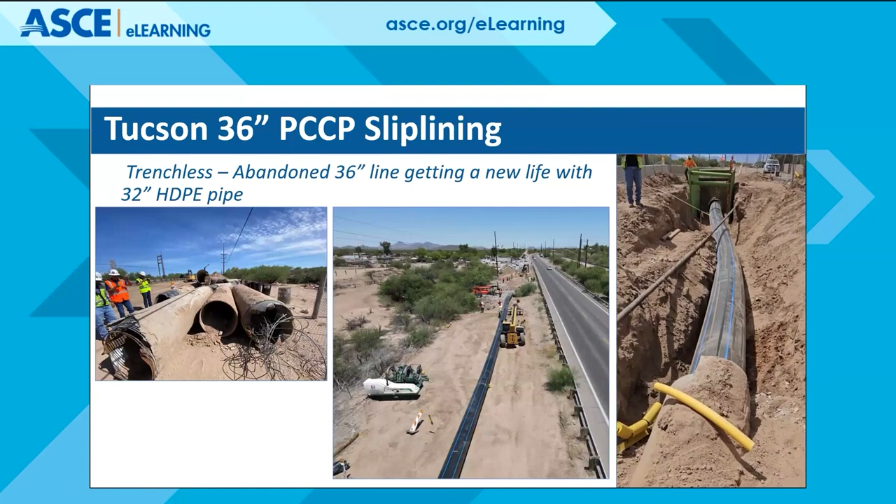So we've got some information for you here. This video is showing us the extent to which we are using that natural property of high-density polyethylene and that allowable bending radius to come right through, avoiding bends, to be able to pull that into place. Pretty impressive what we're doing out there in the rehab space and also new installation space.

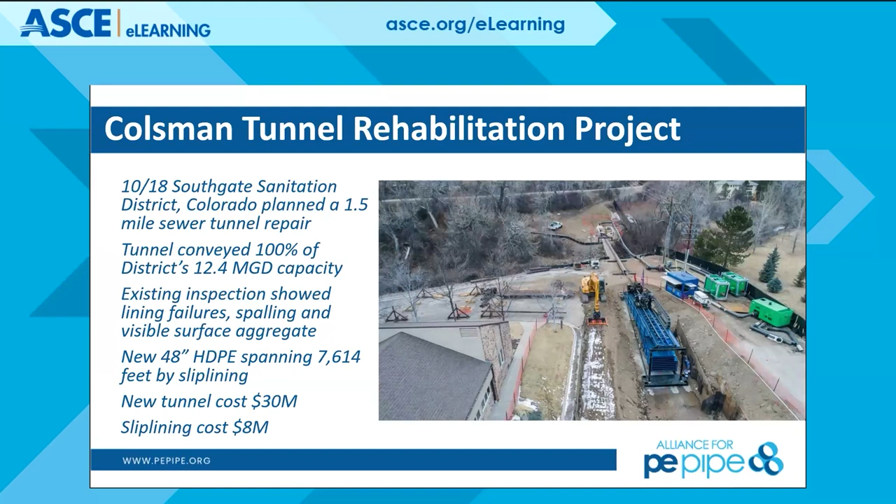So here's a Colsman Tunnel Rehabilitation Project. This is another slip lining application used for a tunnel. A new tunnel through this location was looking at 30 million, but that slip lining is only 8 million, so we saved a fairly significant amount of money for this agency by repurposing this tunnel that had failed in that scenario.

As that pipe gets bigger, so do the logistics of handling that pipe as we come through it. You'll see all of the equipment now starting to scale up and get larger as we're dealing with the appropriate butt fusion equipment to make sure that joint we're fusing together is as strong, if not stronger, than the pipe itself. Now we're fusing a pull head on this to facilitate slip lining through this tunnel. There's quite a bit of pipe length, and definitely some logistics in being able to fuse all that pipe run up in advance.

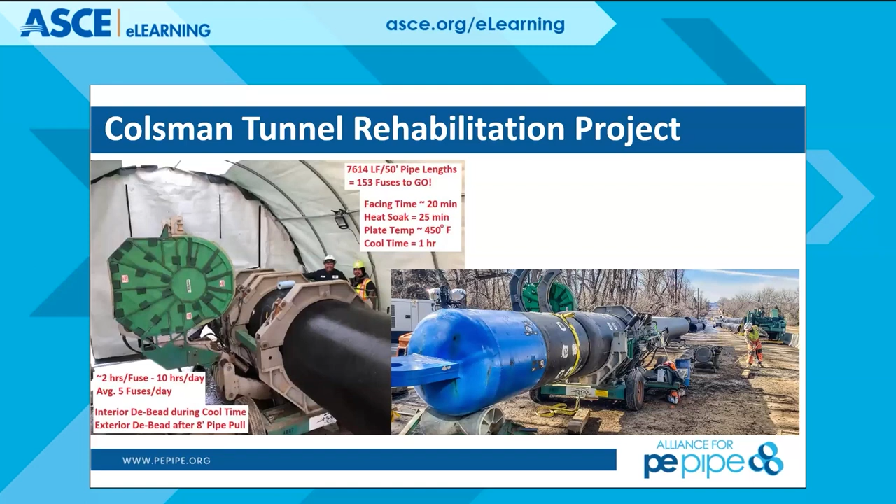One of the key things that experienced installation contractors for high density polyethylene recognize is: the longer that run we can fuse up in advance, the more we'll take advantage of the fast installation methods of a trenchless technology project, to be able to maximize that productivity.

So here we're looking, getting some of the details into putting it into the East Portal Tunnel as we're seeing here.

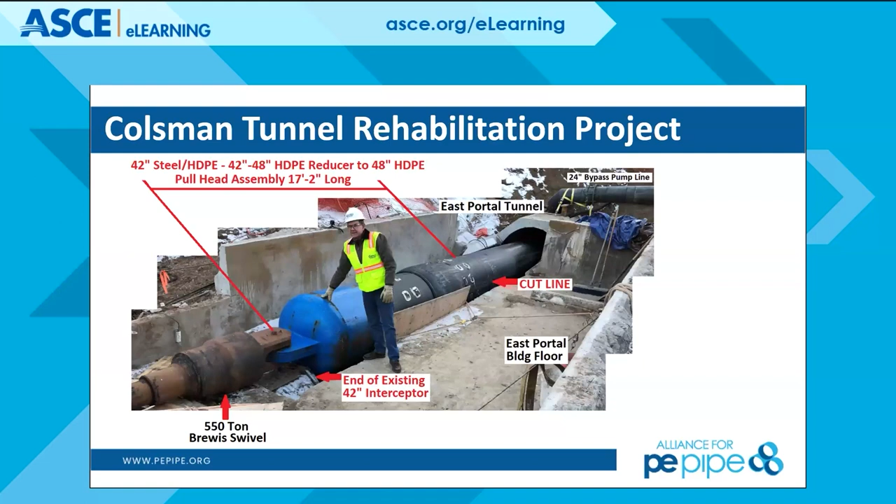So here we are. After the pull is done through this tunnel, we've got a swivel and multiple different pull heads to be able to diffuse that pull force as we go through. And we are repurposing this as well.

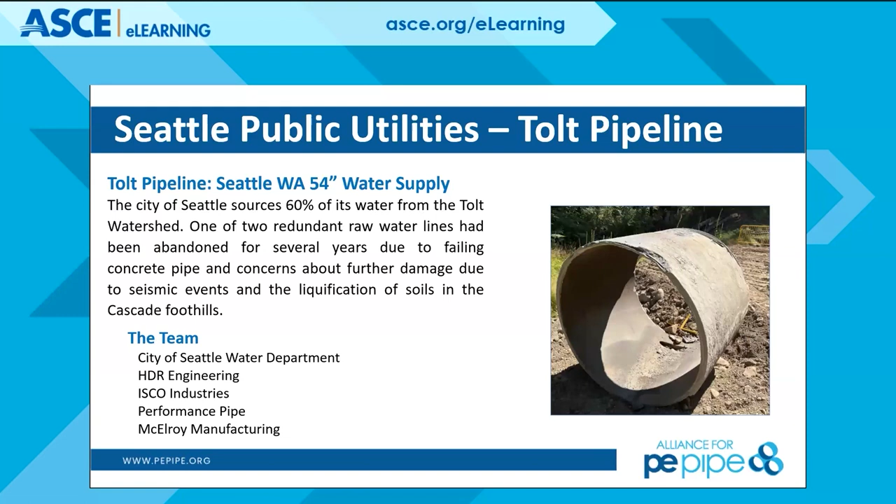So here's Seattle Public Utilities and the Tolt pipeline. This one originally was installed open cut, and now we're installing this via slip lining into an existing pipeline itself. Raw water lines had been abandoned for several years, failing concrete pipe, and then also some seismic events that shifted the soils around the existing pipeline as we pulled that through.

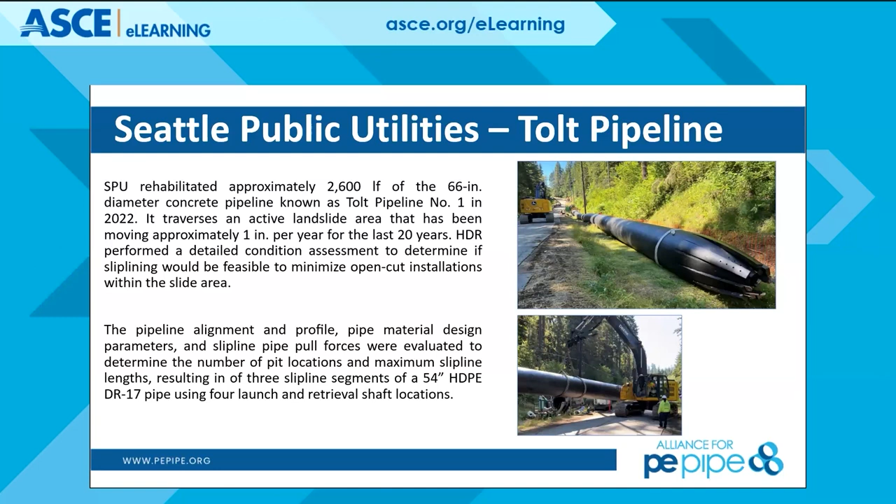So you'll see some of the contractors here had fashioned, field fabricated the pull head to start to slip line that process through it. This really proves the ruggedness and durability of high density polyethylene and the sheer things that you can do to polyethylene in the field, and it still is a very good product as we go through. Obviously this pull head would be cut out and terminal final connections would be made on the clean high density polyethylene through that, but these really are just illustrations of what we can expect to work with for high density polyethylene. Brian, you want to come on and talk to us some about this large project?

We spoke before. I believe you worked on the south end of it. This was quite a large project in Fort Lauderdale. That was an emergency project as a force main was leaking water into the Intracoastal, if I remember correctly.

Yes, sir, it was. It was a series of fairly new pipes that were put in that corroded. And once it corroded within about 5-6 years, obviously the main line there was out of business. So the idea, because it was an emergency action, they split it into 2 contracts. Both contractors had to put in 54-inch diameter HDPE pipes, pretty much parallel, and then tied into the existing valve system and the existing sewer system, all in downtown Fort Lauderdale, while still keeping the streets active.

It's quite an event. It came in pretty much on schedule and on or slightly under budget. Commend to people like Murphy's Brothers and Dave Mancini and Sons, the 2 contractors that had to work out the logistics under very difficult conditions to make this happen.

If I remember correctly, they had vac trucks going 24 hours a day. So just that bypass alone must have been a pretty large expense through this whole process as well. Yes, sir, the bypass can almost double the cost of a project. So certainly consider it whenever you're doing a project. I always ask, one of the first questions I always ask, is whether or not that line is redundant for us. So that's definitely a big one here.

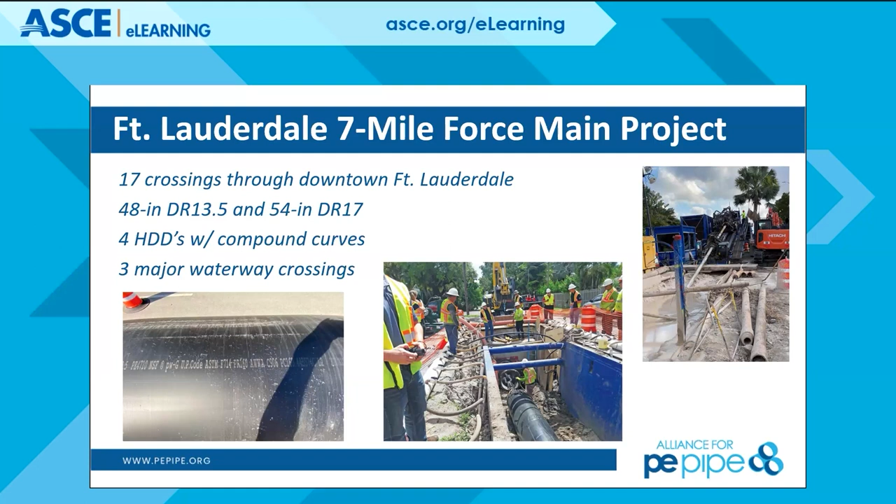Oh, great. Well, that's certainly better than most of them being a pain in the butt. So sometimes we get those too, right, Brian?

That's a common theme with these past two projects there, Brian. That's very good to hear. We had a couple of questions already, and I love to see them coming in. So, terminal connections - after we pull this trenchless into place, what are we looking at?

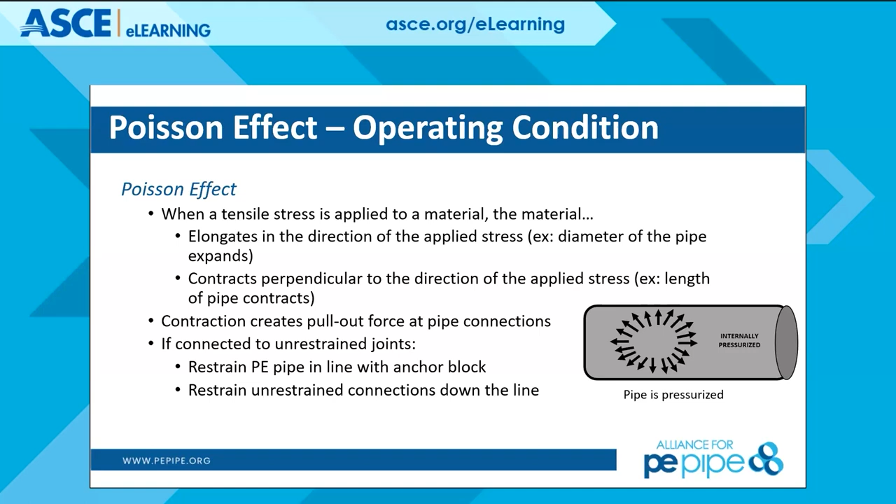And then we look at thermal effects in a lot of installed pipelines. If we're conveying a fluid that doesn't change in temperature, the installed thermal effect really is a temporary condition. So that pipe is sitting above ground, warming up with the sun until we're ready to pull it into place, and then after we pull it into place, that pipe will relax prior to making those final connections.

So one of the unique things about high density polyethylene is this modulus of elasticity and how different it is from carbon steel.

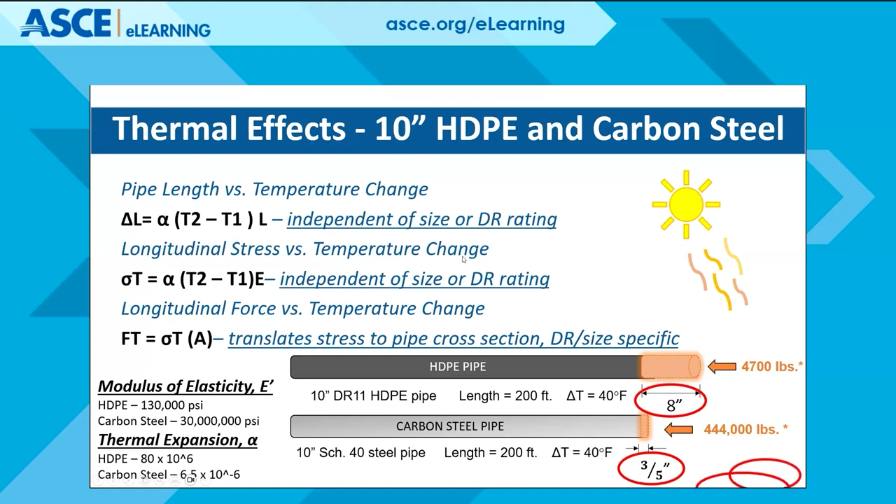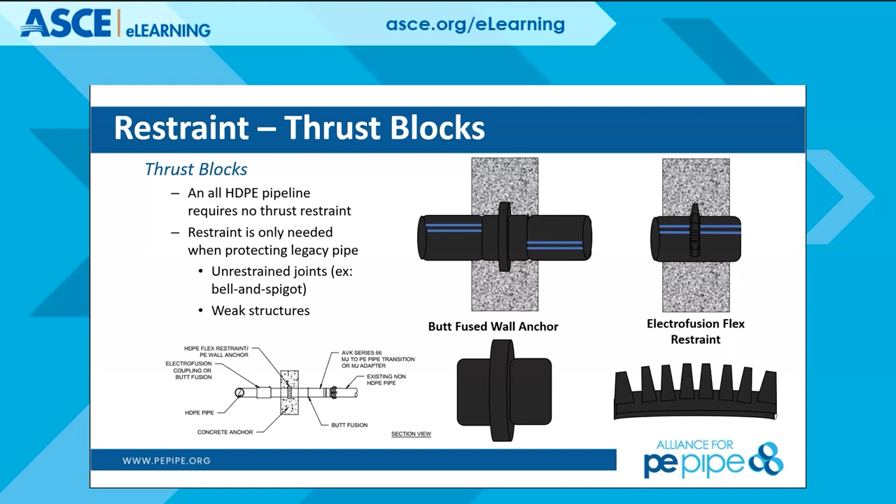Thrust restraint in the polyethylene world: every fused joint is considered a restrained joint. So when we look at thrust restraint, we want to make sure that when we're connecting to alternate pipe materials, we're not going to pull that bell and spigot pipe out of its bell and spigot, since there's no restraint force around it. We're not detrimenting the polyethylene. If you ran polyethylene from point A to point B, you'd have a fully self-restrained monolithic system. It's when we connect to other material types that we want to make sure we're using a restrained joint and not pulling that other pipe out of its bell and spigot.

So what does this look like? Go ahead, talk to us, Pete. You're on mute—sorry about that.

I've got a great question, Alan, I'd like to share with everybody: what is the proper procedure for testing a pipe string before you pull it into the ground? Is it 1.5 times working pressure for 10 hours, or what are the rules?

That's a great question. There's a difference between the operating pressure of the system and the design pressure of the pipe. As engineers, we're fairly conservative folks. Potable water systems have adopted DR11 primarily for their pipes, which happens to be a 200 PSI working pressure system. You could charge that to 1.5 times the design pressure, but that's quite a bit of pressure to achieve in the field. What's typically used is the operating pressure of the system being installed, amplified 1.5 times for a duration to overcharge the pipe, as Brian mentioned, and then we lower that pressure to continue observing the test to make sure we're not losing any water. Any added water to a non-leaking HDPE pipe could be due to that thermal effect and the Poisson's effect we talked about.

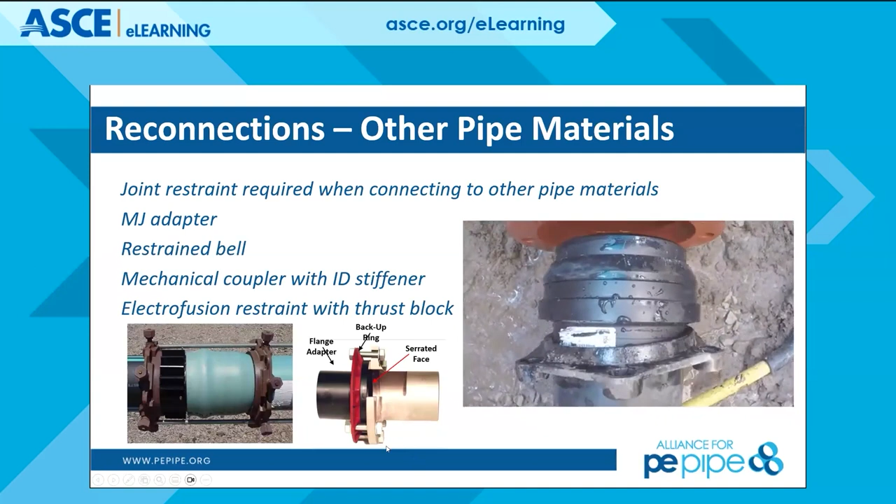Absolutely, great comment there, Brian. I really appreciate that—the last time I did pressure tests in this manner, I had the same nerves about that end cap coming off. But once we restrain it properly to the HDPE pipe using these restraints, this MJ adapter is belts and suspenders, very heavy duty, lots of good material within this adapter. It can also be done in wet conditions, unlike fusion. So if you've got a leaky valve that simply won't seat and you have some water in a potable water system as we're connecting, you'd fuse this MJ adapter on in advance and then pull it right there.

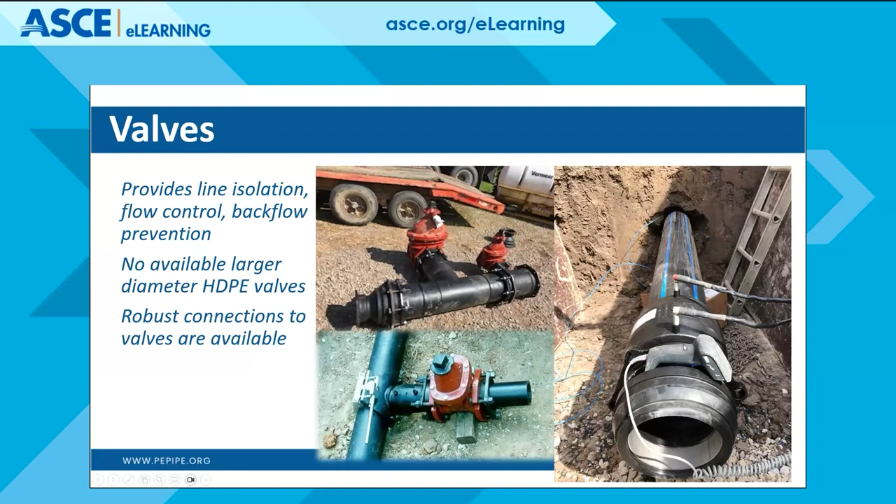Same connection to valves: the industry itself does not have HDPE gate valves. Now HDPE ball valves have started to be used in larger dimensions and larger sizes in irrigation, but they just haven't quite made their way to the municipal water and wastewater market. So we do have to have the MJ adapter or another type of fitting to attach to these valves to be able to control flow as we go through.

And for terminal connections, there are lots of agencies out there, such as Core and Main, that can come on. Rusty, if you wanted to, talk to us some about the fittings that you're going through in these manners.

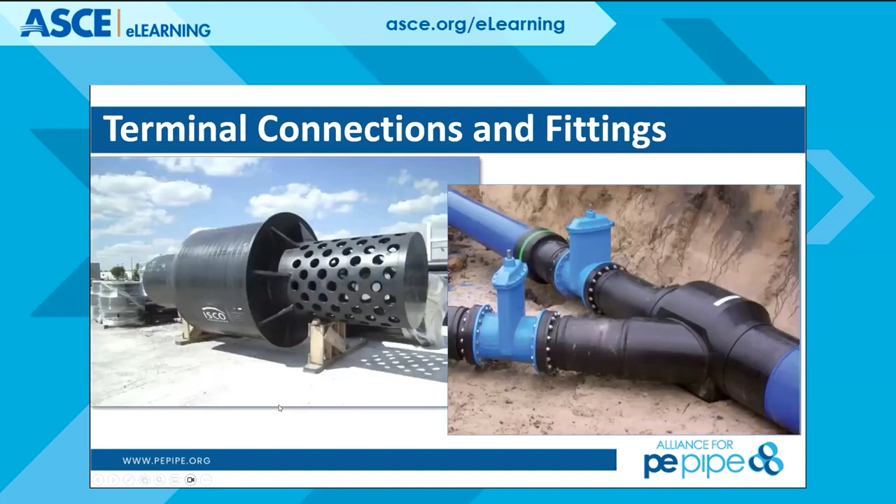There's a lot of different things you can put together and fabricate for somebody to make those terminal connections. That's one of the great things about the increased use of polyethylene in waterworks systems. It's very established, been around since the 50s and 60s, and started on the industrial side.

With the proliferation of no-dig applications, we have a lot more fittings involved. Any type of connection you want to do with polyethylene, if you can fuse it, that's the best way. You're not adding a third or second material, no gasket, no metallic component. If you can keep it polyethylene, which you do with electrofusion or butt fusion, that's what you want to do.

We have in-ditch butt fusion equipment that can go up through 63-inch to do tie-ins. We've done over 500 fusions with this equipment, and it's great for getting into those small places you need to. Of course, sometimes you can't do that, so electrofusion comes out as a backup, your second option. From there you go into mechanical types, either flange by flange, MJs like shown before, and all types of saddles that are also available.

Ideally you do want that fusion if you can. Even flange by flange is really good because the best gasket material you can use is a Teflon material, and that Teflon has the same durometer as HDPE. So if you're going new to new on flanges, you don't even need a gasket in there. You bolt that together and it gives you a zero leak rate system, which is probably one of the biggest positives of using HDPE piping systems.

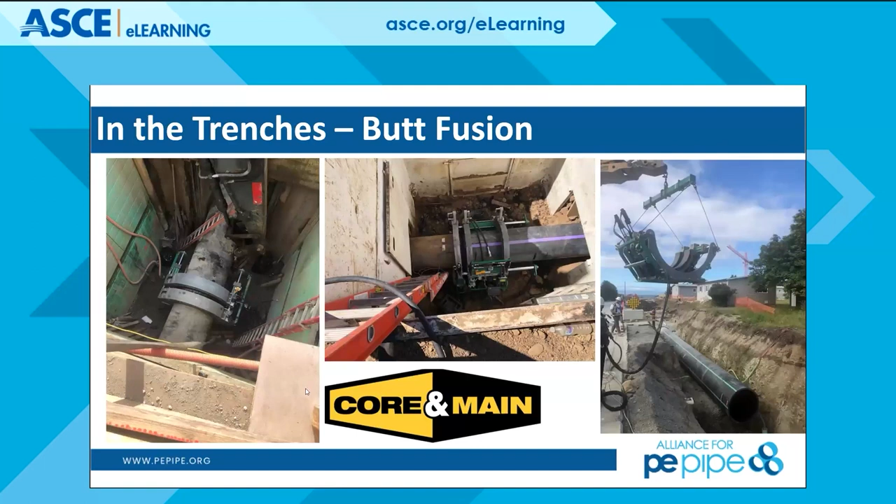Thank you, and Mary, thank you so much for that follow-up. So here we'll roll right into HDD. Brian, come back on and take her away, bud. Sounds good, I appreciate that. I'm going to talk a little bit about...

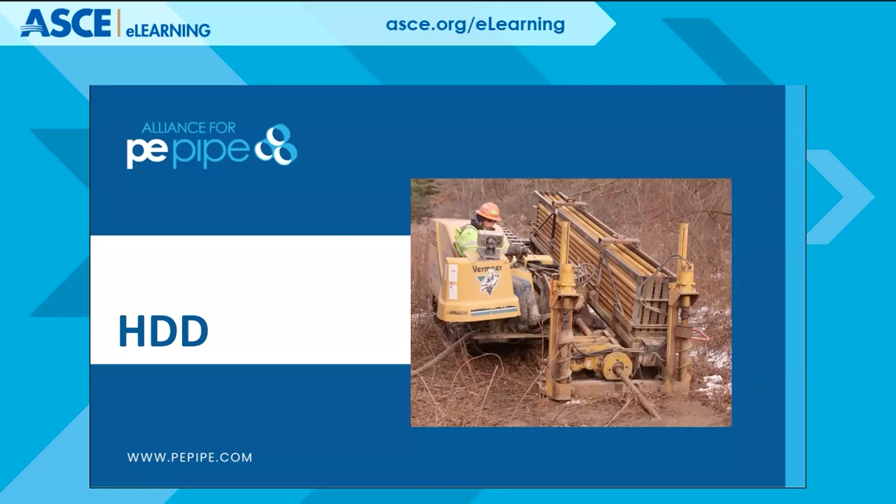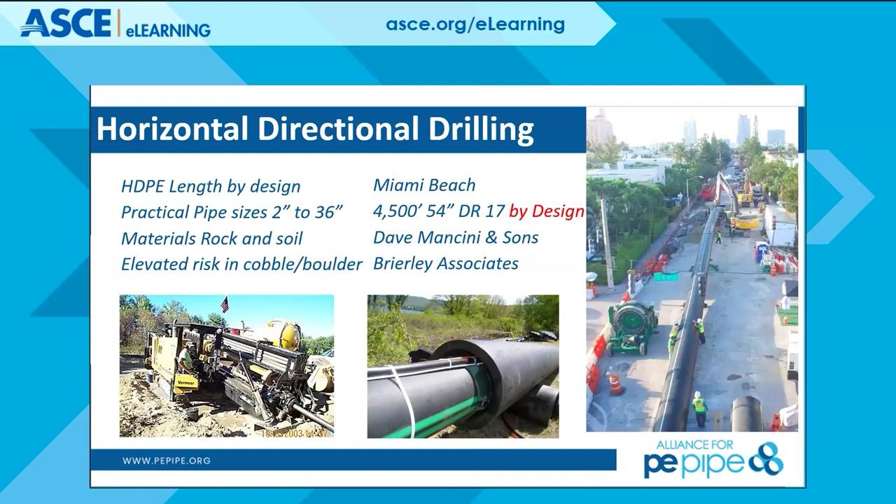HDD, horizontal directional drilling, and the use of polyethylene pipe. I'll be pretty much focused on that. With this type of pipe and this type of engineering, you'll find it different from other types of pipe. You need to be both a pipeline engineer and a pipe engineer. There's a distinctive difference, and I'll go through that in the discussion, irrespective of whether you're talking small, large, or double stacked like the force main in the middle there, or the real long one, which is South Beach, Miami, trying to handle the pipe into the ground.

You need to be careful about actually designing the pipe. There's a pipeline engineer, which designs the geometry of the bore, and there's a pipe engineer. You have to look at your materials, understand what you're working with to make sure that what you're designing will work under your situation. More failures out there occur because of lack of proper consideration for the materials you're working with. Nothing wrong with the materials, but be conscious.

And they're very well published materials. So between that, the only other quick comment at the beginning here is production rate. It controls your pricing on any project. So if you have rock, it's going to go slower, it's going to cost you more. If you're in soil, you can get less cost. It's not the contractor changing and playing games with you. It's what the ground will let you do.

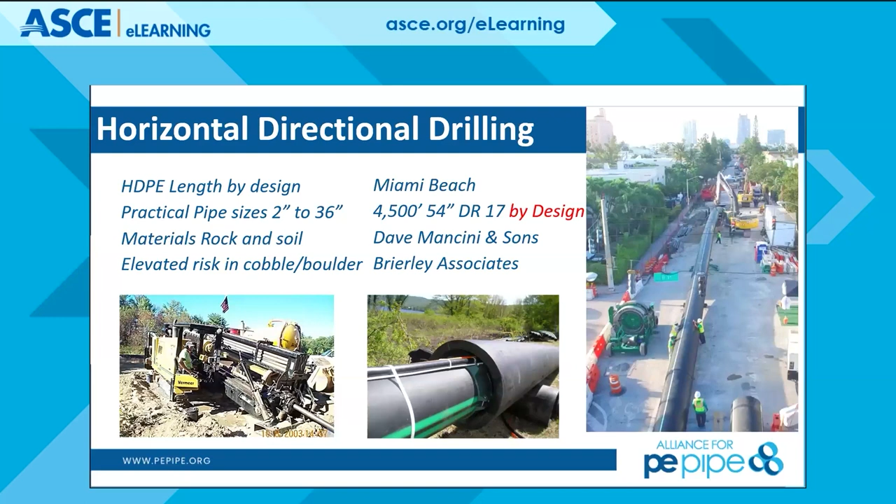So with that, just a basic of what horizontal directional drilling is. It starts out with a pilot hole, which you have to steer through the ground. A whole bunch of different steering techniques out there. You can either use a wire line, a walkover. It's very dependent on the type of conditions you have. This is the type of thing that once you have a project lined out, discuss this with steering experts. Find out what's going to work best for your system to be able to steer it from one side to the other. Next slide, please.

The next step is you got to make the hole bigger, unless you're just doing what's called a drill and pull, where you drill the pilot through, grab your product pipe and pull it back. But a lot of times on the bigger pipes, you got to make the hole large enough to pull your product pipe through. That's what the pre-reaming is for. Usually you bring your pipe up, the rule of thumb is 1.5 times bigger than your pipe OD. That can be changed around with some techniques, and people have gone as tight as no difference.

So this is a general discussion of how HDDs are done, not the only way they can be done. So be aware there are other ways that things can be done.

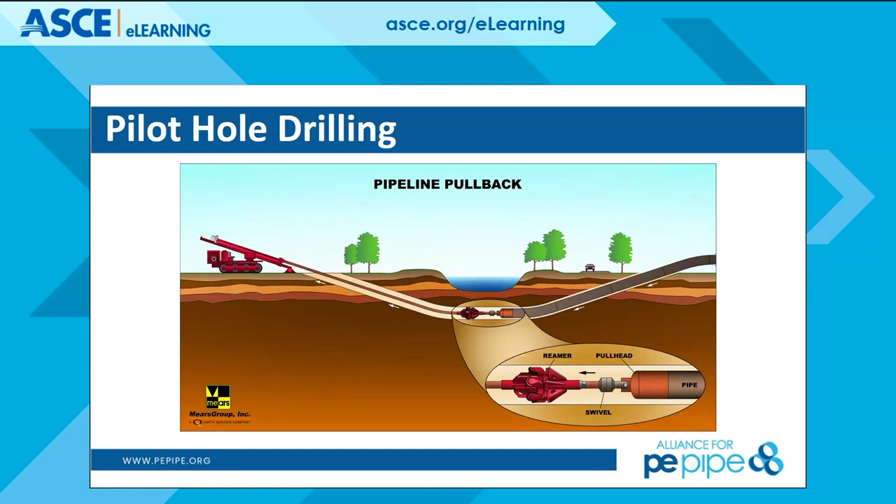Once you have the hole prepared, you clean it up by pulling a swab through the hole. Make sure you've mechanically removed your cuttings and whatever's left over in the hole. Grab onto your pipe and pull it through. This is where you need to pay attention to your pipe materials. I don't care what kind of pull you have. If you have a good hole, you can calculate fairly reasonably your pull, and that'll tell you how far you can go. That's part of the planning process.

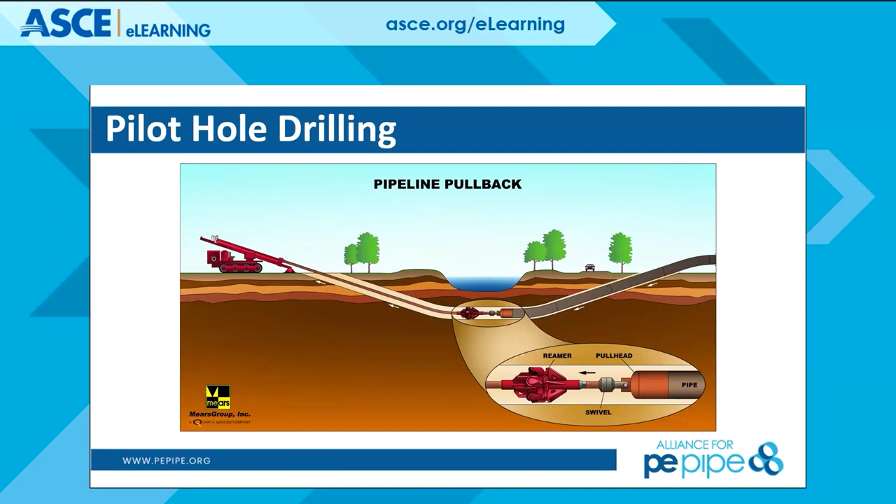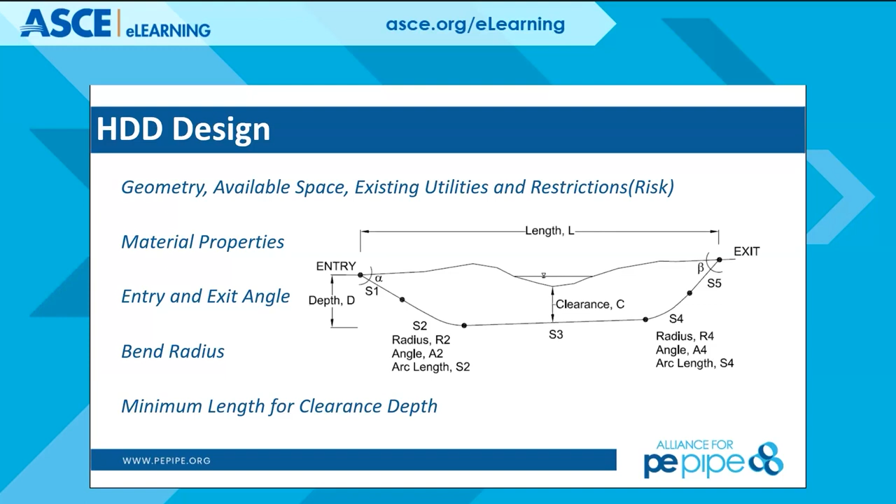With regard to design, design is basically planning your job, trying to anticipate issues that may occur and fix them. Part of that is selecting your materials, your material geometries, your material cross-section areas, properties, etc. Remembering that design, just like they say in the Army, your plans, your design, they're only as good as the first shot in the ground. Be flexible, work with it. It's a planning tool. If you try to use it as 'the contractor will do this no matter what,' you're probably going to be disappointed.

Next slide, please. As I mentioned earlier, these are the different types of steering. They require different work areas and different accesses to the site. One of the main things is, it sounds like trenchless - well, you only need to have one access point at one end and a receiving point at the other end, but somehow you've got to steer things. When you talk about things like a walkover, all you've got to do is be able to walk across your site. Well, if you're doing that on a 4-lane highway, there are techniques available to assist you with that, even with a walkover.

Or you may have to go with a wire line, which is a little bit more precise with depth, or you might have to go with a gyro. Each one of these has pros and cons. This is why once you come up with a project, it's really beneficial to talk to an expert in steering to get the type of steering you need to accomplish what you're trying to do. If you want to have a pipe within 1 foot of a particular location in the ground somewhere, you're going to be adding a lot of cost.

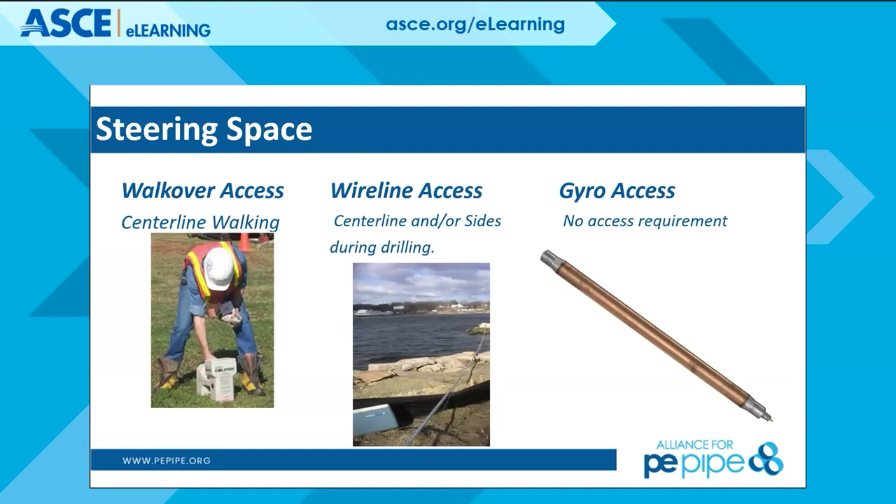Not that it can't be done, but that's up to your steering people. Find out what it's going to cost and what you need. The other one is know where your utilities are.

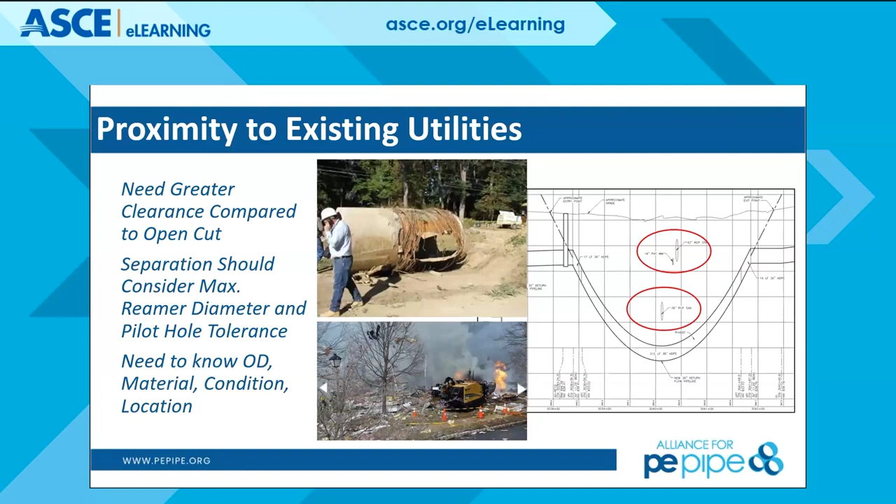So pay attention to what you're doing, pay attention to where the utilities are. And basically, rule of thumb, give yourself as much clearance as you can get. It's going to help you immensely.

Next slide, please. So, and the other thing is what your needs are going to be in an entry area. Say you have something 400 feet long and only 50 feet wide. You got to understand your drill rig's probably going to take 85 feet from the front end of the drill where it goes in the ground to the back. You need to have available space that allow the drill rig to fit in there with all this other appurtenances.

The other thing is on the entry pit there, a lot of times that's a place where you can lose drill fluid, and we'll talk about that in a minute. But a lot of times what I'll try to do is make that drill pit where the drill goes in the ground about 50 feet behind my construction barrier or environmental fence. If anything happens, it's usually a lot of times in the first 20 feet vertical of drilling, getting down to a 20-foot depth. If you have that buffer in there, you get to control it in an area of your choosing.

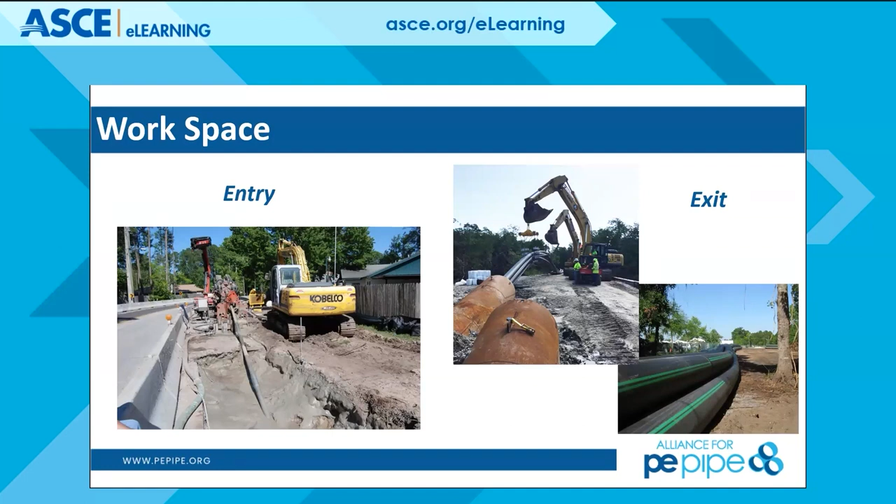Geometry, exit and entry angles. Those are typical rule of thumb is 6 and 18 degrees, somewhere in that range is what they can do. But a lot of times I try to limit to 8 to 12 degrees because it's a convenient dimension to go in at. You're coming in steep enough to get down soon enough to your design depth, and you're coming up at a reasonable degree where you can actually bend the pipe to fit it in the hole without having to lift it up.

So that exit is very important because you got to still get the pipe in the hole, which means you got to bend it from horizontal down into the ground. If you bend it too far, coming up too steep, you're going to have to lift the pipe up in the air. Anytime you do that, it becomes a safety concern.

The nice thing with HDPE is that it bends a lot. So you can leave it generally on the ground, just round your exit pit a little bit, and the pipe will pull in just fine, saving you a lot of safety heartburn.

Also look at your rig capability. I've had certain times where you can't move the rig back. There's no reason you can't dig the front of the rig down a little deeper and accomplish wherever you're going to intersect with your design path. So entry and exit angles can control how your rig is set up, but they should be kept at a reasonable degree as possible.

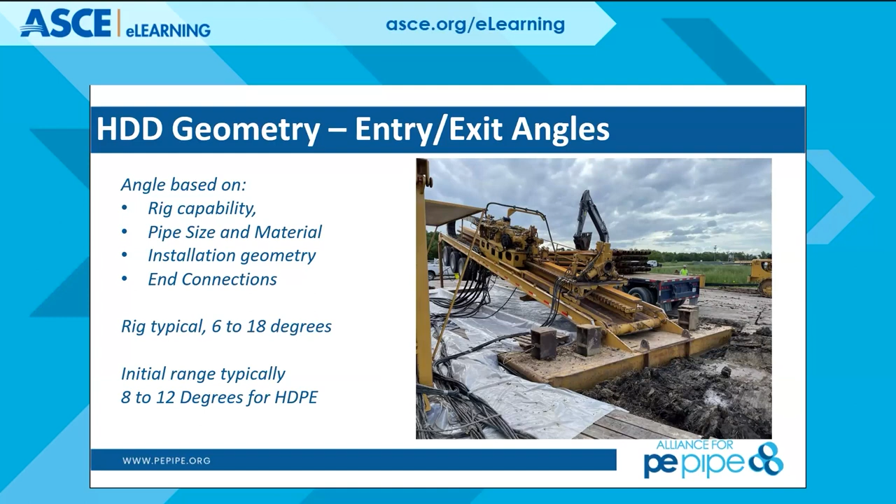Brian, one of the things I'd like to reinforce is that entrance and exit angle limitations are easily one of the biggest errors that engineers not familiar with HDD design make, upon initial thoughts for how fast we can clear that obstacle. We're not going to do a 30-inch horizontal directional drill 20 feet deep in about 200 feet. Isn't that correct, Brian? Absolutely. That's a good point, Alan. You're not going to do a 200-foot creek crossing with 30-inch pipe in a 200-foot length. Some things, you just find another technique. It's not the right solution.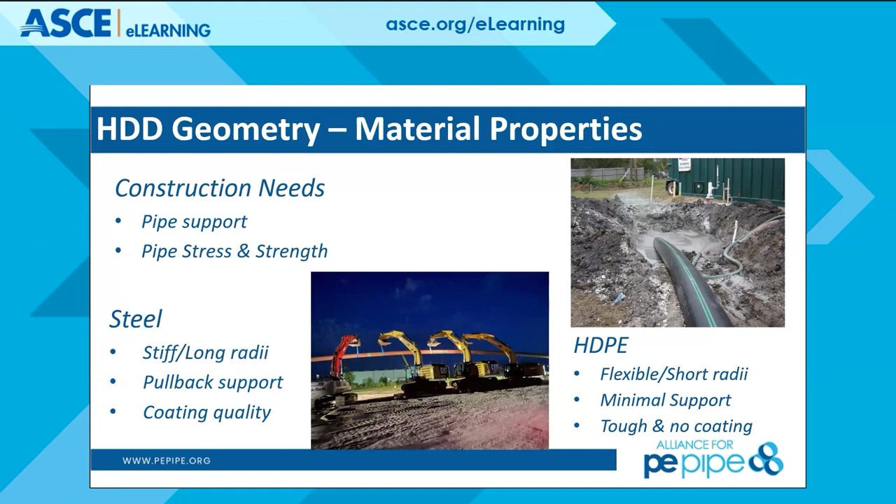That's where you get into bend radius - we did talk about that a little bit earlier. Bend radius is pretty well published as far as HDPE, how much it can bend. The issue I run into more times than not with bend radius is people look at it in terms of, well, when my pipe's in the ground, that's my bend radius, and that's what I've got to use and make sure I can put it in the ground.

Well, the problem with HDPE in this case is you need to have a drill rig if you're using HDD to put it in, and your radiuses are going to be controlled by your drill steel, not by the pipe. So you've got to make sure you can actually construct it. Otherwise, if you're designing to the HDPE minimum radius, you're designing something that is not likely to be built using the HDD process. So again, know your pipe, know your materials, know what's going to control your design as far as the geometry of your layout. It can be the drill pipe or the HDPE pipe, but 99% of the time you'll find it's your drill steel that's going to control it. And that doesn't mean you go to your drill steel manual and find out what the sharpest radius is.

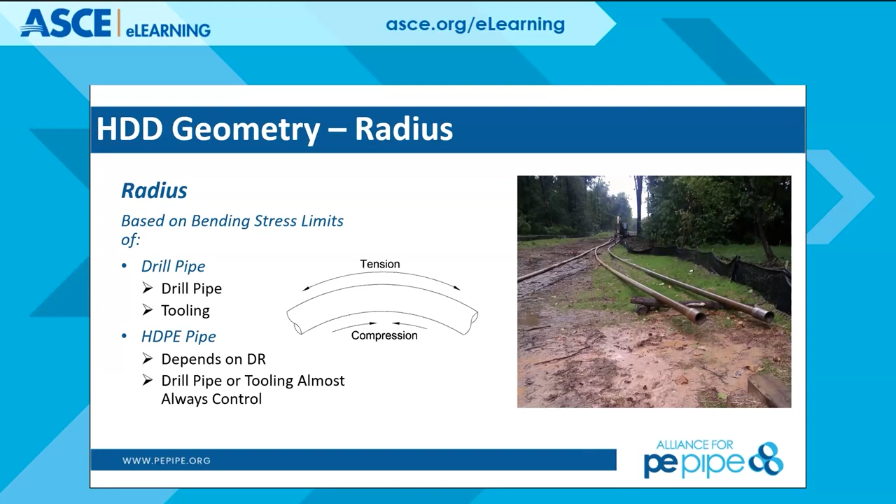If you do that, you're going to exceed your bend radius at some time, because the contractor is not perfect. Double that at least. There's a little planning tool available on the PPI website that can help you with your pipe selection. Once you've figured out how much force it's going to take to pull your pipe in, make sure you have enough thickness, registered by DR.

Make sure you have enough thickness for the size pipe you have to give it enough strength to pull it in. The other nice thing about this is you've got a little calculator on the left there, where you put in L3 at 0. If you have L3 at 0, you only have your pipe entry and exit angles controlling, and if you bring them up to the ground surface, that's not a good idea.

Your bore has to be a minimum of that length, it can't get shorter. Good rule of thumb on your entry, before you make your vertical curve, have at least 2 drill rods in the ground, preferably 3, and that's your bottom tangent, L3. Try to have at least 2 or 3 rods in that area to allow your contractor to make corrections should he have difficulty in the ground. Again, the tighter you make your tolerances, the more expensive it's going to be. Give your contractor a chance.

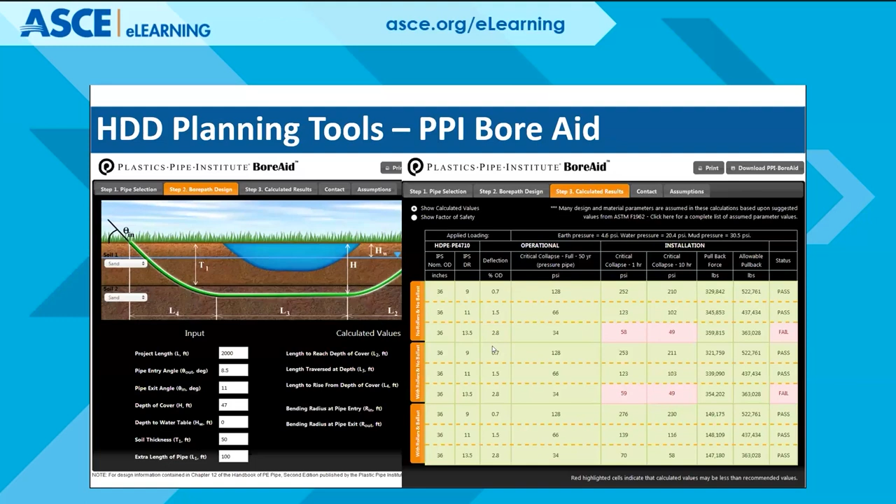Pipeline design, this is what I've been harping on a little bit. You can see you have to design for the materials. This is our connection at the ends of two HDPE drills down in Miami Beach. This is where the 1200 and the 3000 came together. Notice the type of connection.

It's a very rigid connection, fused on, and then bolted together with links to create a secured joint. You want to make sure that stays secure, because right here I have a pipe that I actually have to tap in yet and go sideways to connect to the existing system. So know your pipe material, know the strength, because the Poisson effect comes into play here.

Temperature comes into effect, as does your pullback strength. In this case, we had an issue where we couldn't get all DR17 pipe. So knowing my material strength, we actually worked with a DR17, a DR13.5, and a DR21. If you know where your loads are going due to your proper pullback, you put your strongest pipe where your highest loads are going to be, and you can get away with a weaker pipe at the other end.

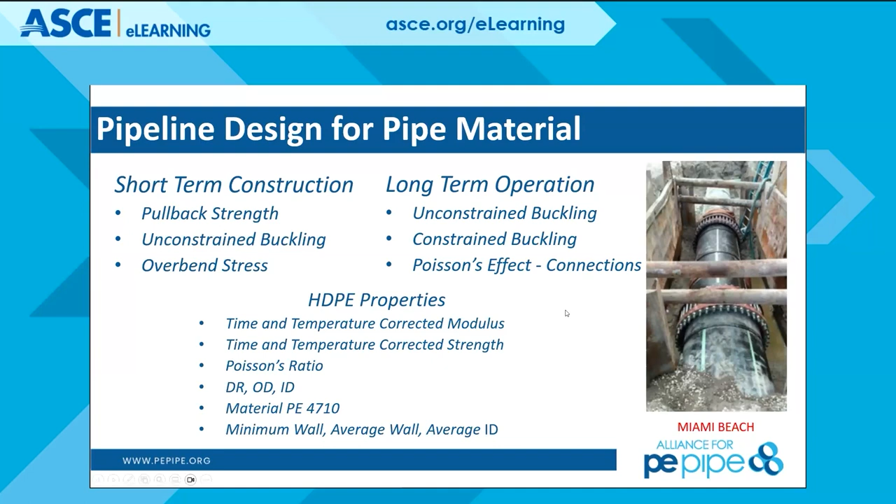Can you go past it without causing damage? Sure you can, however your heartburn level starts going up. And once you get down to, getting close to your ultimate critical or ultimate pull strength, your heartburn levels should be right off the wall. So you don't need to stop immediately, but you do have to understand your materials and where you are in your design, and then the strength of that material to be able to control your heartburn level and have a successful project.

The reason I put in the geology section and subsurface conditions is because that's what really controls your drill geometry. You can always design any sort of catenary geometry going down and back, put it wherever you want. However, if you don't put it in the right geology, it's not going to work, or it's going to cost you a lot more money.

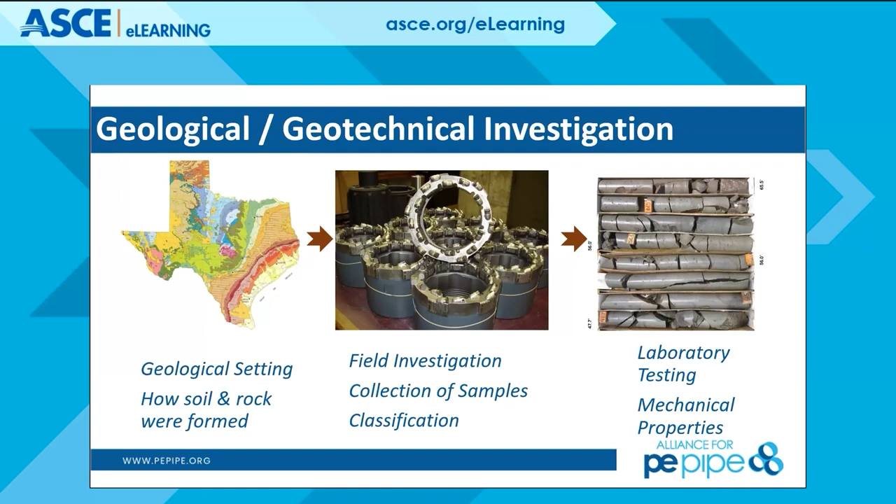Well, you have a job that's going to cost you $7,500. Are you going to spend $10,000 to get geology? No, you're going to spend a lot less. So maybe you go look at locally available information, call your local public works person. How you do the explorations to get that information, like I said, you can go to Public Works, you can look at local DPWs for what they have, or you can do test borings. All depends on your risk.

As you find out that you have different types of problems, one of the main ones is, am I drilling in rock or am I drilling in soil? Because that can have a multiplier of about 10 on your project cost. It costs you 10 times more to drill in bedrock than it would in soil. So that's an important question, you do want to get an answer to that. Lots of ways of doing it.

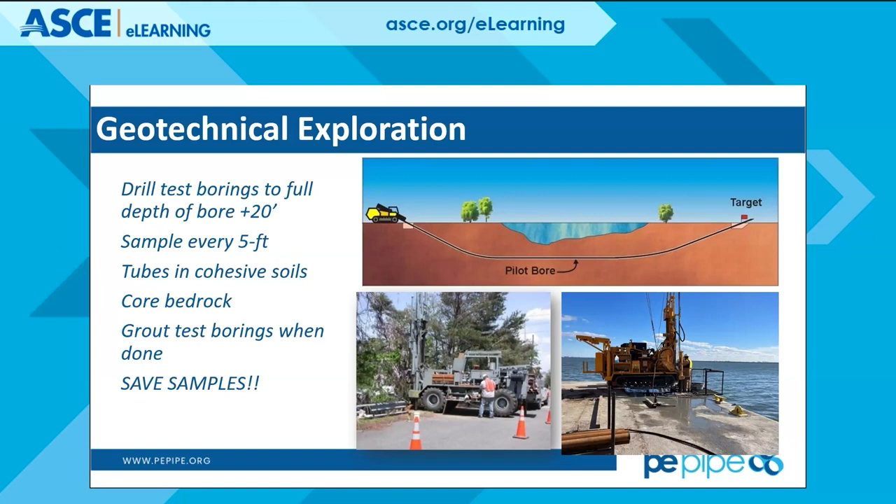This is just subsurface explorations. There's all sorts of techniques out there. Talk to your geotech engineer about how to properly, good enough, get the information you need.

Next please. Characterization. Once you have that in there, the next step is, say you have rock or soil, now you want to know, do I have really hard soil? Characterize it a little bit, give the driller a chance to figure out how fast he can penetrate this. So that's what all this is going to. Higher density soil takes longer to go through, going to cost you more.

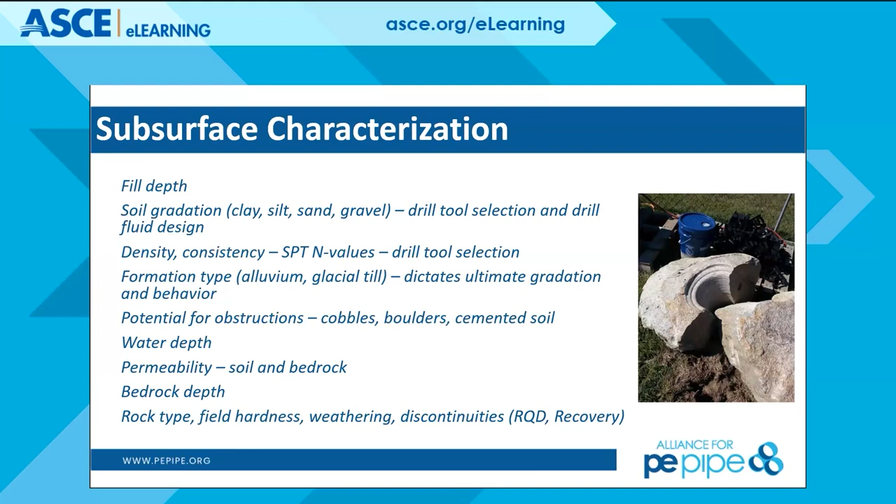If you have a lot of water, maybe you have artesian water. If you have artesian water and you drill through it and intersect it, your whole hole can collapse, and it can cause all sorts of auxiliary problems like with people's wells. So look at all these types of risk that you want to characterize with your exploration and understanding what the data is telling you from your explorations.

Things like cobbles and boulders, really bad idea. Not that it can't be done, but it's going to cost you money.

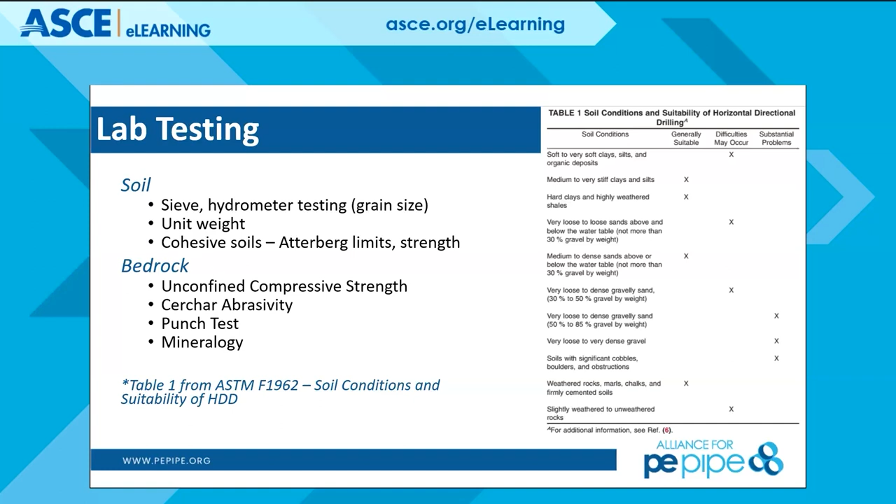Lab testing. There's a whole bunch of different lab tests that can be applied here. I'm not going to go through all of them. The reason for the assortment is there's different problems that can occur. Say you get a real sticky clay, you want to know about it so your contractor knows how to design the drill fluid so he can actually drill through it. Same thing on the unit weight. If he has drill fluid, it'll have an assortment of drill fluid weights. That'll give you an idea of how much ground strength you need to keep that fluid in the hole. So all these things, lab testing data gives you ways to analyze this using available resources, like F1962, just one of the resources.

I have a list at the end here, but use the lab to characterize things. Next please. With that, put together a picture. A picture's worth 1,000 words. You can write this up in fancy geology language and be really precise and accurate, and find out that the driller has found a nice round file to place that in, and it's not doing anybody any good. Draw a picture, be clear, let the contractor know what he's getting into.

It's a team effort. To be able to construct a hole requires a team effort. Your contractor and you as a designer and planner, you have more information than the contractor does with regard to what's in the ground. The contractor knows how to deal with it. Give them a chance to come up with a way to deal with it.

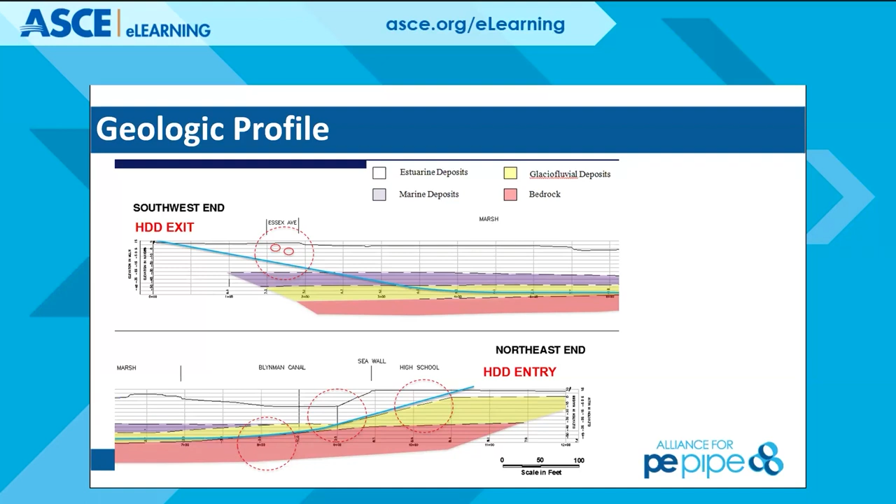Give them a picture. It works.

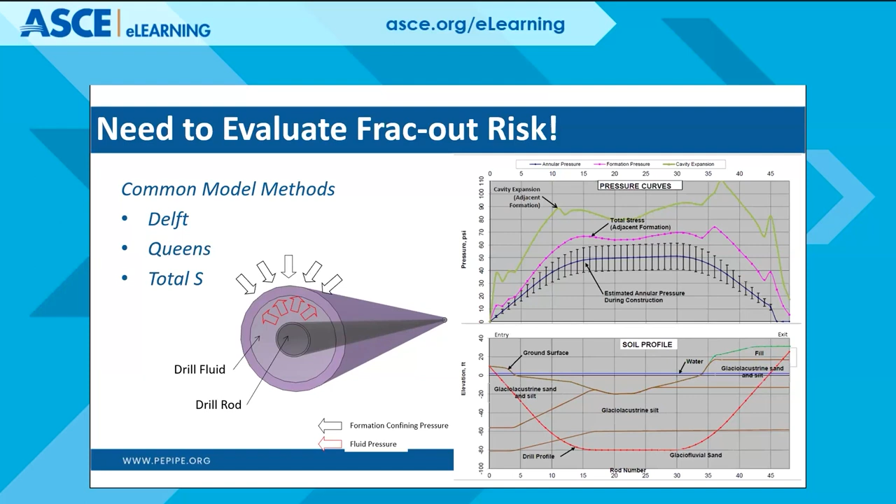Once you have your risk, you need to evaluate it, and this is where your design comes in - evaluate things like whether you can keep the drill fluid in the hole. There are several common methods: Delft, the Queen's method, total stress method. They all say the little arrows pushing in on the hole need to be stronger than the little red arrows trying to push out. You can ensure that by design, as a planning tool to help you select what depth to actually drill your hole. That's the difference between real design and just drawing a line on a plan saying 'drill this line' - design is the method to come up with where you should actually be drilling.

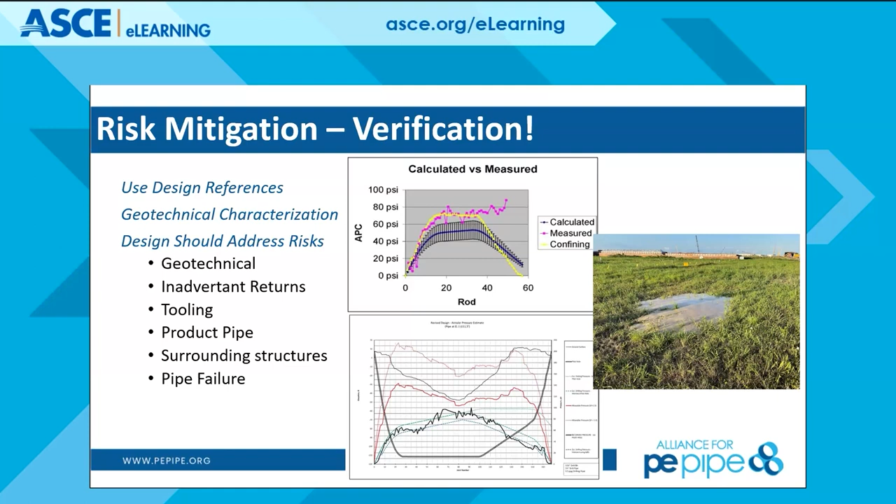It really does work. On the top middle there's a plot I did down in Florida - you can see the prediction was lower than what we actually measured. The key thing is that every time it went either sharply down, sharply up, or off into Never Never Land like on the right-hand side, something was happening down the hole. I don't really look at magnitude, I look at the changes, and that helps you interpret what you planned to see versus what's really happening. The one at the bottom just shows the difference. Each of these techniques gives you different curves to work through as to whether you're going to keep the fluid in the hole or not. Know which one you're working with and understand the mechanics - are you at a high factor of safety or a low factor of safety - so you don't wind up with that alfalfa field on the right filling up quickly with drill fluid that turned into a lake.

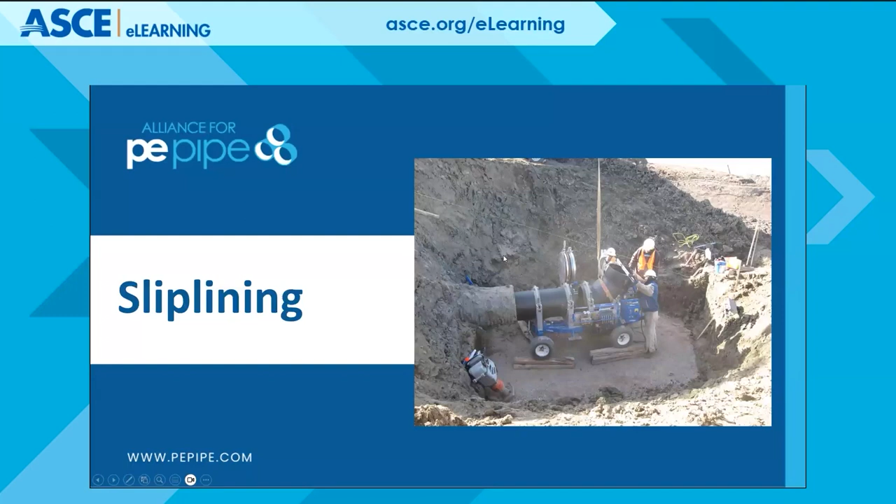Florida now has a guideline where you have to go a certain depth depending on your hole size underneath the roadway. Two things can occur: you can heave the road and create a large blister by losing your drill fluid from being too shallow, or you can erode a bunch of sand out from underneath it, creating a sinkhole. Note that the blister effect can happen almost immediately, but the sinkhole settlement effect can happen weeks after you leave the site, and it can be a tremendous surprise to traffic, suddenly losing their front axle. So excellent question—it needs to be looked at very carefully and critically on any road crossing.

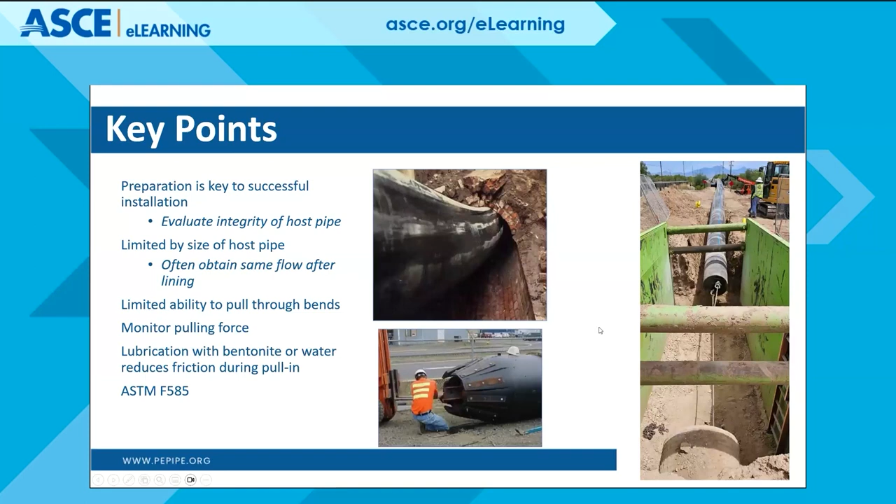So here you'll see some field-made pull heads to be able to distribute that force along this HDPE as we go through it. And again, this really highlights the robustness of HDPE as we're working with it in the field. So here we have a project where they've fashioned and fused on a pull head and took that over to start pulling it into place. And on the right here, they simply provided access to that pipe itself and then started to push it in. Richard, you want to tell us, since you took this video, what we're looking at here?

Yeah, this was beside the Miami airport. This was a 60-inch, I believe, steel line that was being rehabilitated, and they cleaned that steel line first. Then the 54-inch—you can see the hole with the strap on it—usually pulls that pipe in gradually as it went through, but the front end loader, which you can't see on the end of this particular pipe, about 300-400 feet back, was literally pushing the pipe in. I asked the head engineer there, is that line clear? Because if you had any kind of disruption or unevenness in that steel pipe and it caught, that driver of the front end loader would have a little surprise—the opposite of a fly hitting the windshield, but the operator hitting the windshield. So there's a safety factor and a safety condition there, but they did push on. They eventually removed the strap because it just got in the way since it wanted to get pushed in. But that was probably a 2.5 minute, 400-foot installation—a 54-inch pipe in a very, very short time. The host pipe was very smooth and very accepting for that to happen. That's the pipe preparation we're talking about.

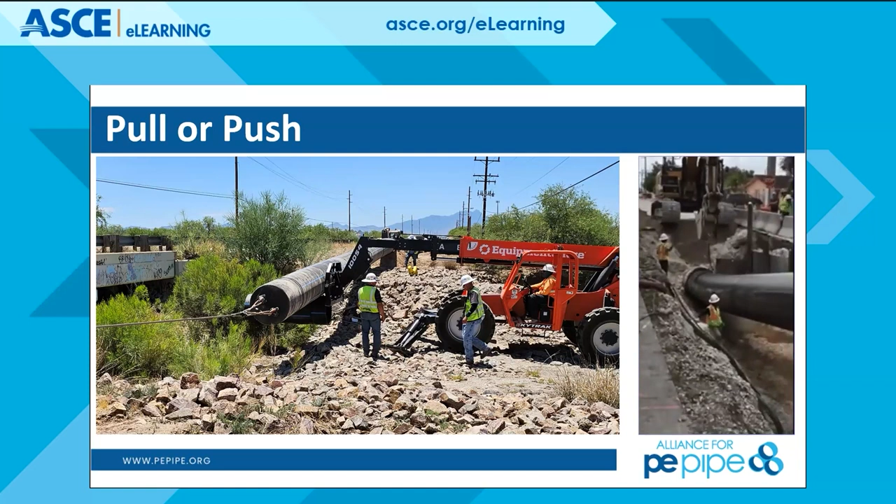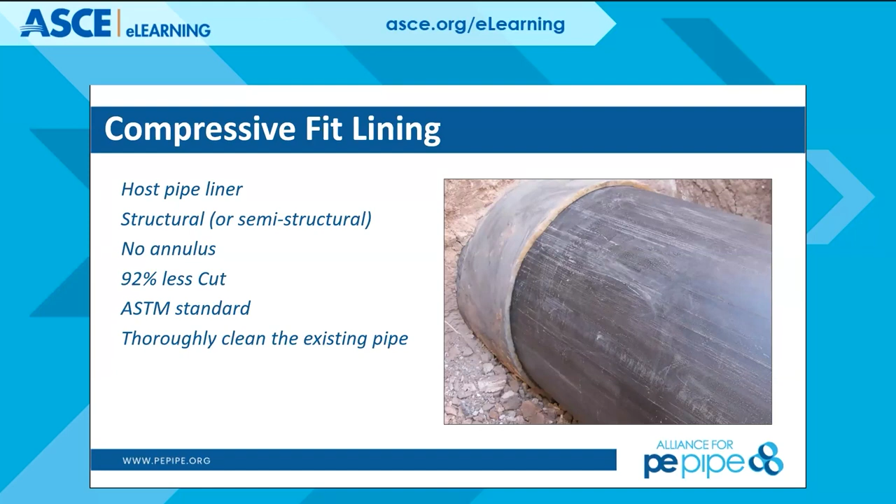So there's a difference between slip lining and compressive fit slip lining. For compressive fit slip lining, you can only use high density polyethylene. We're taking that OD of the HDPE, temporarily changing its shape to make it a smaller OD, pulling it through that existing pipeline, either through a die or a series of rollers or other things that make that activity go.

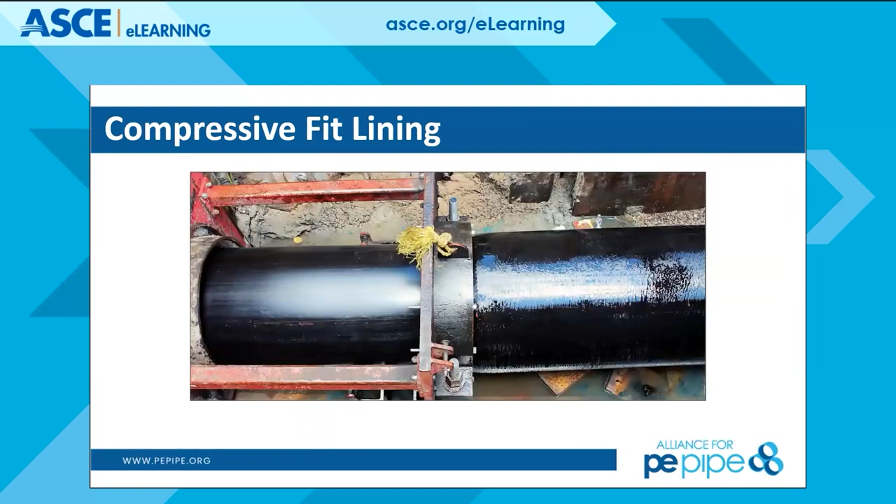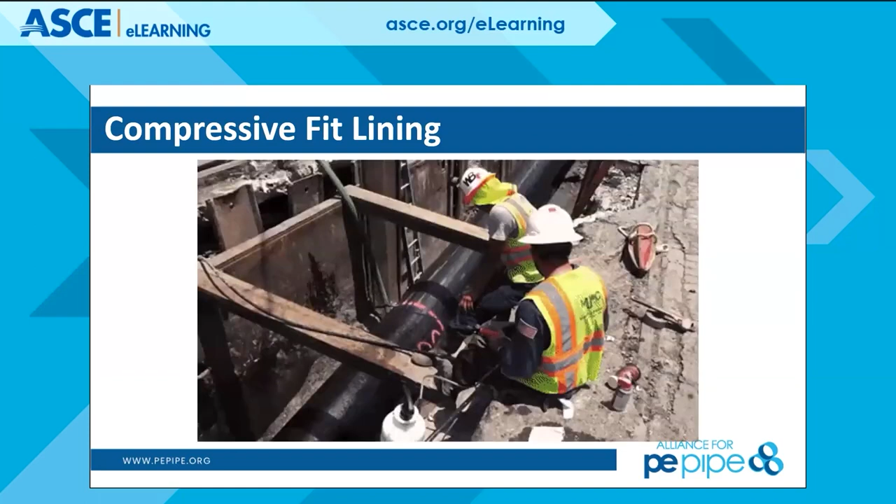We are taking advantage of the material properties of high-density polyethylene to temporarily change its dimensions. Once we pull that line into place, we allow that pipe to relax, and it pushes up against the host pipe. So we spend a lot of good time thinking about the preparation of that existing pipeline to make sure there's no obstruction within it that could stop the compressive fit slip lining process.

Again, any bends or anything within the system, we simply will not be able to pull through those, so they become a point of excavation.

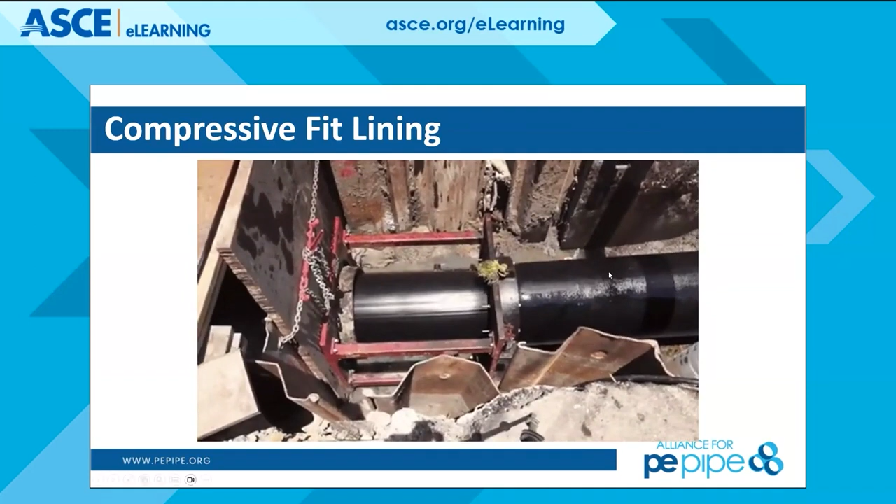Yeah, so just a point - when you see a pipe get compressed like that, everybody asks, does it affect the performance of the pipe? And the answer is no, because it's below the yield point, which references the elastic modulus of the material. So there are no detrimental effects from pushing that pipe down to that smaller diameter and holding it under tension, because they're below the yield point in the graph - I think 9 to 10% in the yield point curve.

It's pretty cool, is what Richard is telling you. That's exactly what it is.

So those final connections can be robust, as we've shown before. All of the butt fusion equipment is designed to be removed from the chassis to be lowered into that excavation to butt fuse in the hole in that manner.

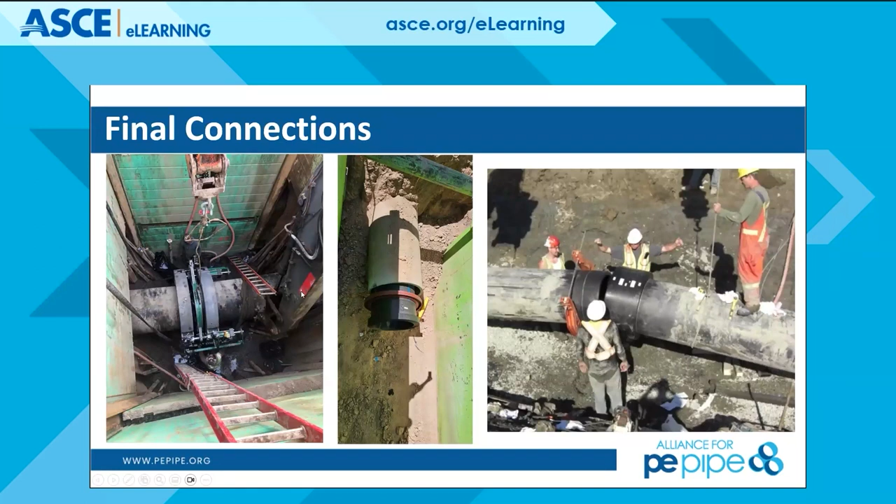Pretty cool stuff. We'll talk a little bit about pipe bursting. A big distinction between slip lining and pipe bursting is that slip lining is often used for a pipe that we cannot burst - you're simply going to pull that liner in. In pipe bursting, we're fracturing that existing pipe and pushing it into the 2 to 4 inches of soil that surround that replacement pipe as we go through. Both are very well proven technologies, commonly used all the time.

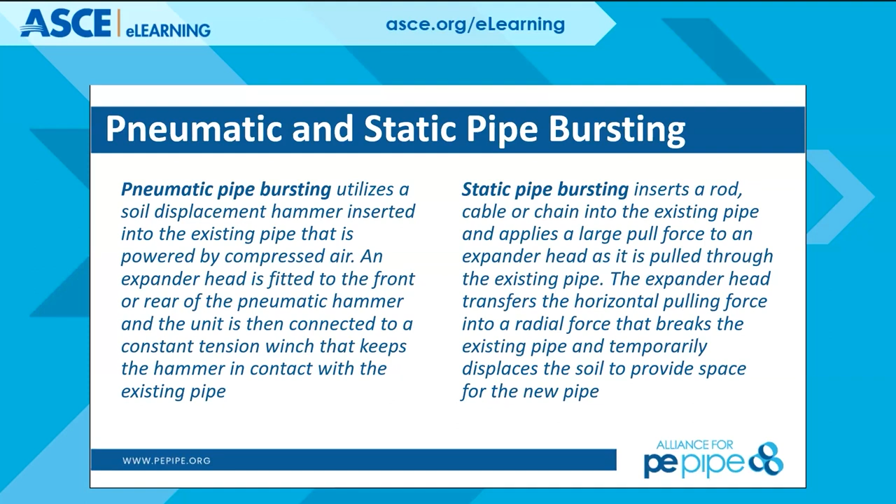A big difference between pneumatic pipe bursting and static pipe bursting is pneumatic can only use high-density polyethylene, and static pipe bursting can use other pipe material types for that production pipe.

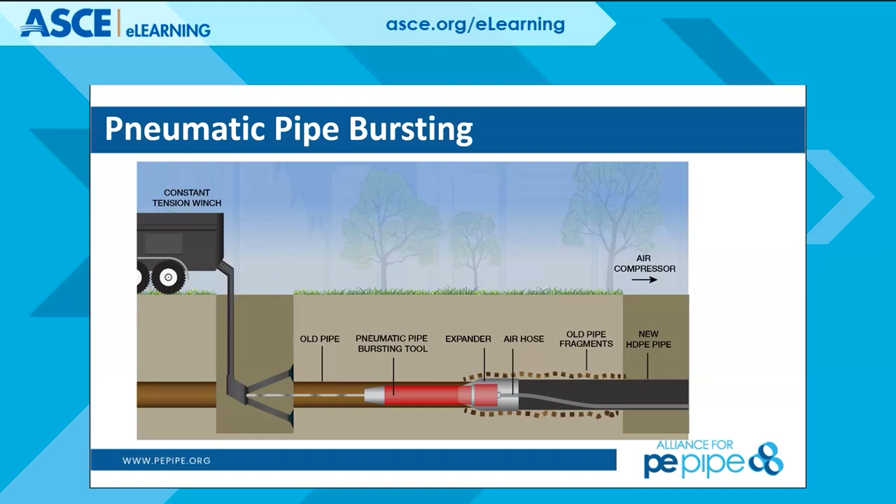So we're simply using a constant tension winch to be able to pull that expander head in line with the existing pipe, and an air compressor is on top to provide compressed air to operate that expander head in a pneumatic scenario, as we're seeing here.

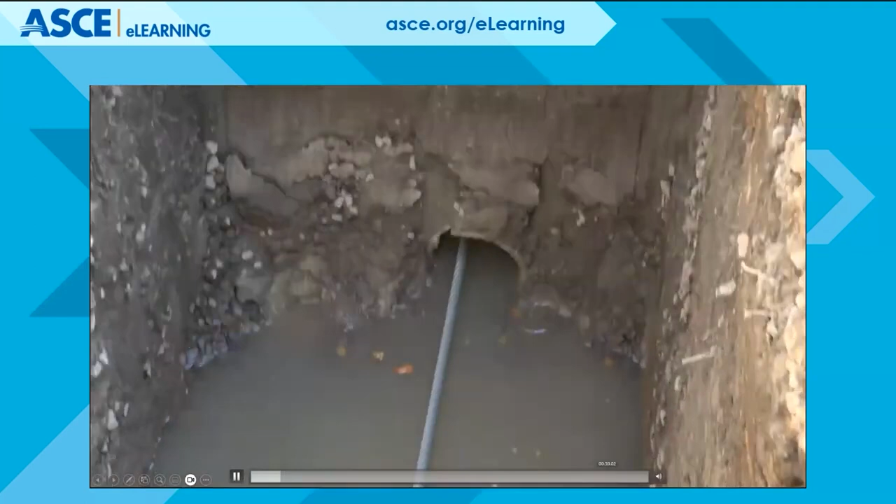Here's a video for you. Pete's taken on a project in Napa where we're bursting asbestos cement pipe, and you're seeing that winch associated here. By the time we get to the end of this pipe run, we don't have enough confining pressure on that pipe to be able to burst it through, so it daylights, and all of those pipe fragments stay in the soil surrounding that replacement pipe, as we're seeing here.

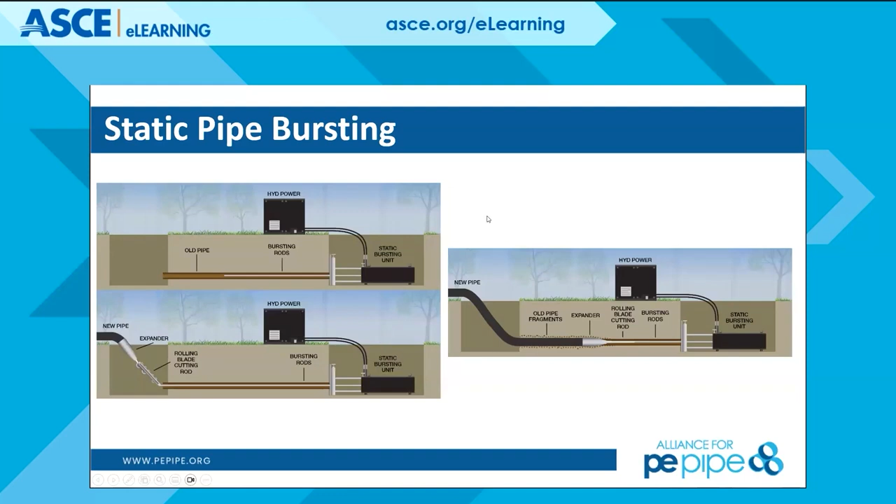Static pipe bursting does the same thing, it just provides the force through different mechanisms. We have a bursting machine in an excavation that provides that burst force, and it's driven by a hydraulic power pack on top. Here are some examples of using static pipe bursting for potable water.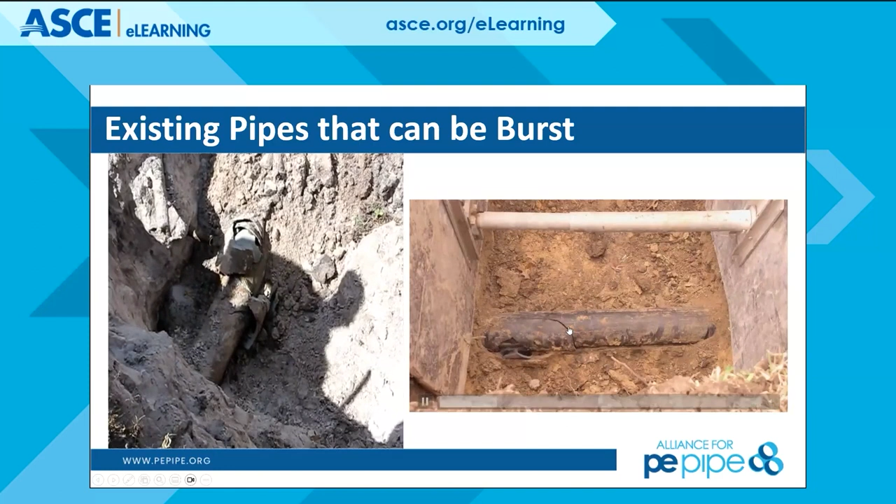So here you're seeing existing asbestos cement pipe being burst, and that fragment stays within the 2 to 3 inches of soil surrounding that replacement pipe. And then here you're seeing cast iron pipe that's being burst as well.

We've had questions over the years about whether or not this pipe fragment scars or damages the high density polyethylene, and it does not. The technology is borrowed from British Gas, which had a sacrificial 3-meter section pulled in advance on every bit of it and studied that.

And yes, Peter, we've got a few minutes here. Great videos, thanks for sharing.

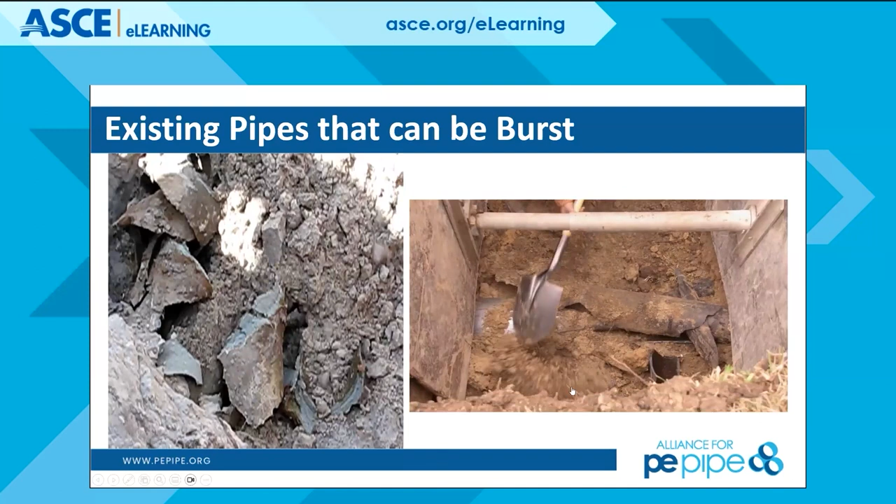I just want to correct the record. I stated that HDD was invented by British Gas, but that was pipe bursting, Alan, not HDD. Martin Cherrington is the icon of HDD. Thank you, Brian, for correcting me, I just wanted to clear the record. Alan, take it back, perfect. Thank you, Pete. I always like it when you get to point out where you're wrong, Pete, so that way I don't have to. Love that.

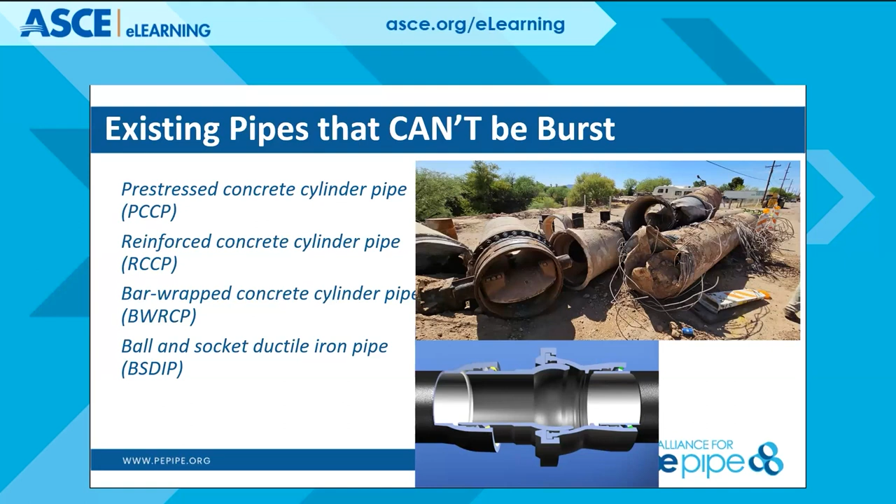So here's some examples of pipes that cannot be burst, and you can imagine why.

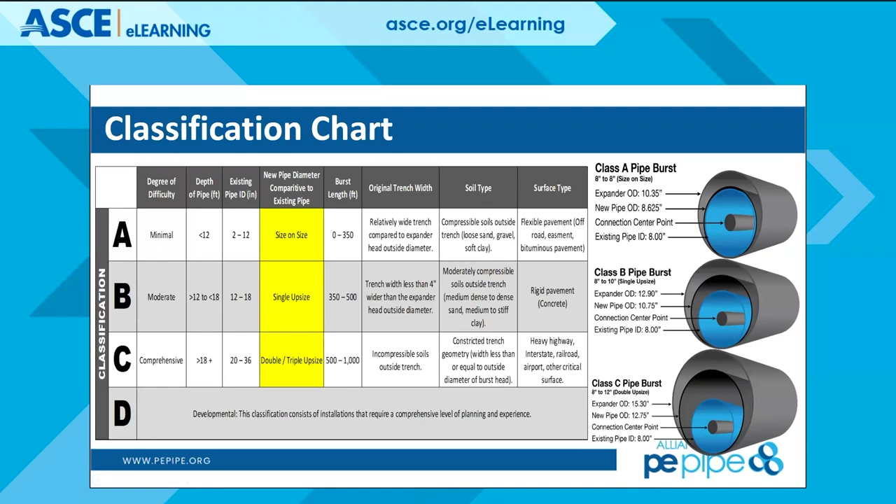Here's a simple classification chart that the IPBA has put forth, and we get into that size on size, it's just a class A type. When we get into developmental, that's going to be triple, quadruple upsize. This is much bigger pipe as we're going through, much longer lengths, and then also bursting something like ductile iron pipe or something else of that nature.

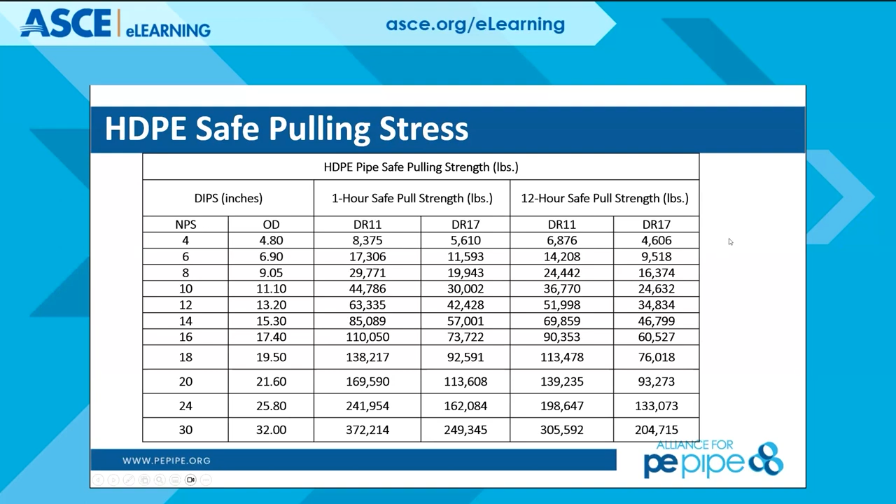Now, Brian had mentioned about the safe allowable pull stress, and the HDPE industry itself has significant resources available to you. This is just a simple translated graphic from the published safe pull strengths found in PPI handbooks and other things that are available.

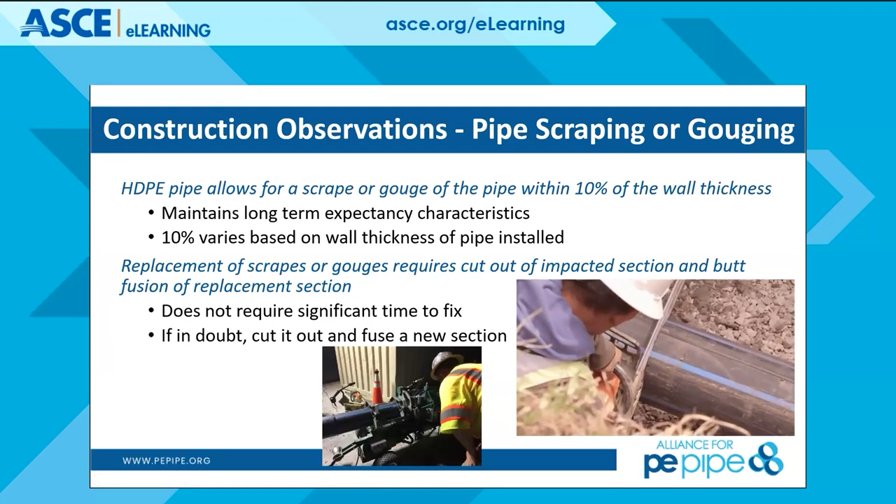Richard, you got something else to say? Yeah, I'm sorry, I deleted a question because I was going to answer it online, but someone was asking about sewer lines and multiple connections when you're bursting. Yes, the answer is yes, you can burst them, you just have to dig a pilot hole where those connections are for each one of those connections. Sorry about that, I lost the question. Thank you, no problem, Richard.

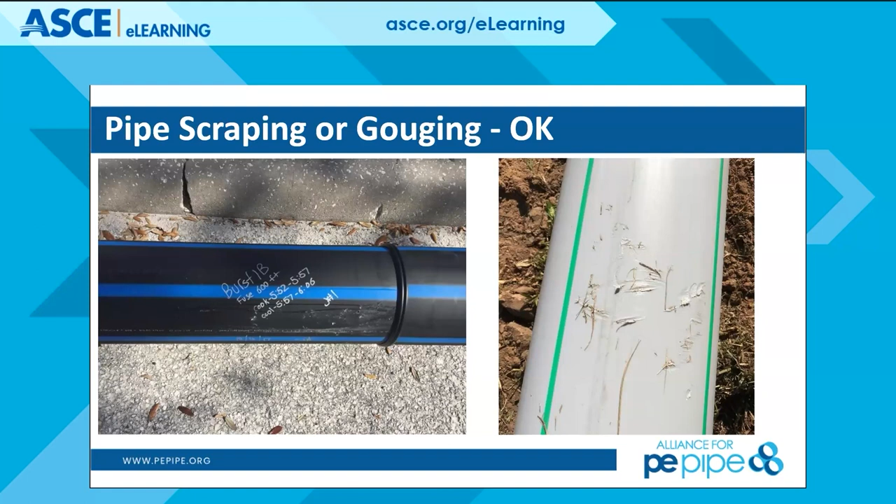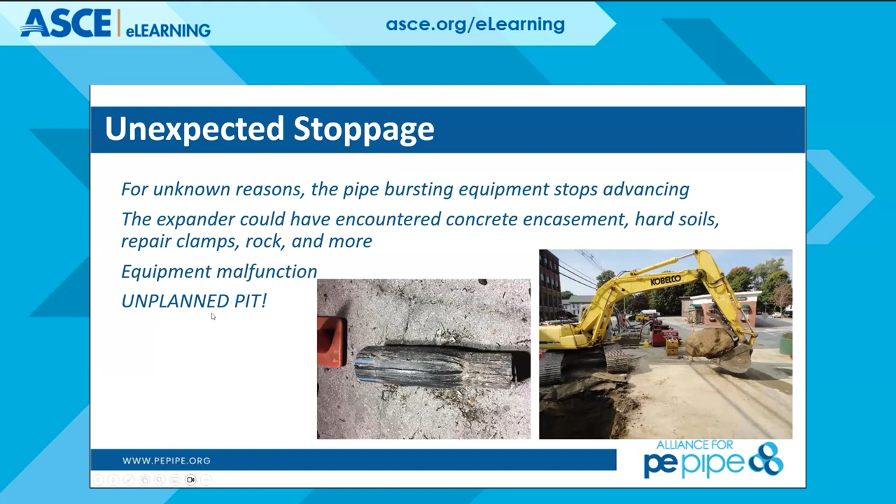So all pipe bursting projects do have the capability to have an unplanned pit, in which case each superintendent on site is prepared to dig that unplanned pit to remove obstructions or anything else we find, such as this boulder that you're staring at.